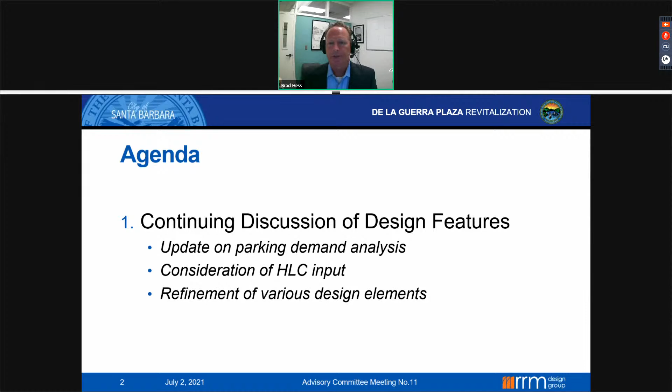First, we anticipate the parking and traffic study to begin in the next couple of weeks. You may recall we did a preliminary study back in 2019, and we were just about to do an in-depth study just as COVID hit, so there was no normal to study. Now that we are in the new normal, we have a State Street that is very much alive, and people are getting back in their cars. So we need to better understand the demand, and having spent more time in the plaza in the last two weeks, I'm really looking forward to this report to better understand the current demand.

Here's the diagram from the scope of work that Associated Transportation Engineers will be doing, which will include car and truck counts, visual and video documentation, and determining the pedestrian flow. We should have that report completed sometime in July, and this information will help us in the design and help us decide what to do with De La Guerra Street. Next slide, please.

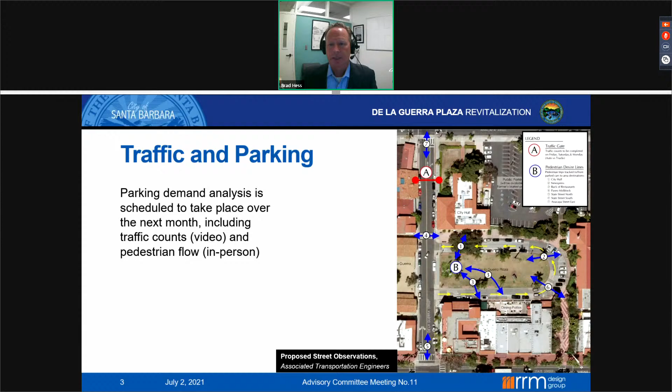Leif, I believe you are going to begin here. Yeah, thank you, Brad. Good morning, everyone, it's good to be here. On May 7th, as everyone remembers, we had a joint meeting of the HLC and this committee.

We had a long, robust discussion on a number of topics. On the screen here is a full list of the items that were recorded in the minutes from that meeting. Some are grayed out, some are black. The grayed out items are topics that didn't really generate a lot of comment, or there was general consensus on, or they were deferred to a future meeting because we weren't ready to talk about it yet, or the commission wasn't ready. So what we're going to focus on today are just the items in black, the highlighted points, which were the items that did generate some comment from the HLC.

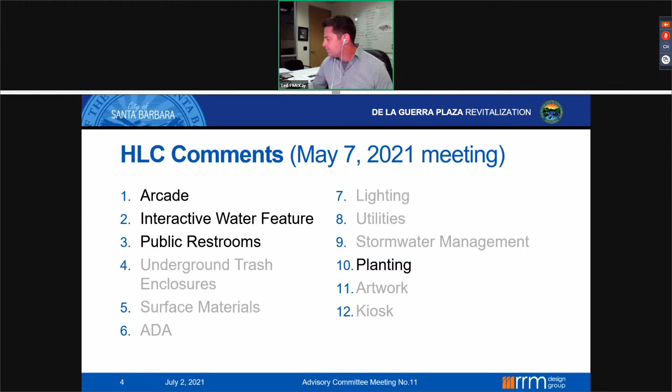I have with me today my colleague, Detty Peikert, who many of you probably know. He's an architect that leads our Santa Barbara architecture practice, and he's going to present some of our thoughts on the arcade. Detty, are you there? Yes. Okay, I'll hand it over to you. Thank you, Leif. So again, we're reflecting back on the joint meeting and some of the comments, particularly as they pertain to the arcade.

I think it started with some questioning about the purpose of the arcade, then a request for explanation of the design, and we got comments back. One concern was whether using an arcade with arches that reflected the arches on City Hall was the right approach, particularly since it might be taking away from the significance of the arches at City Hall. So we went back, took the other comments, and decided to explore a couple of other options for you to consider.

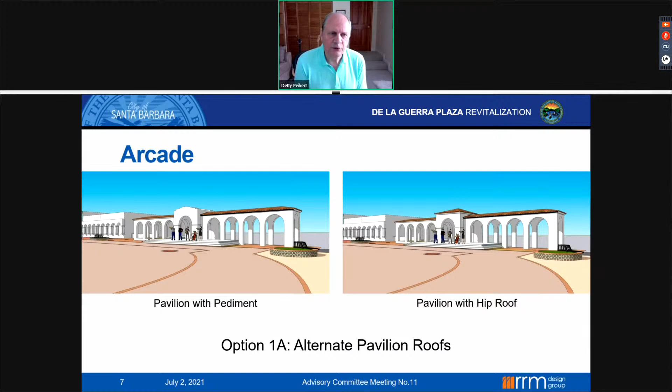We ended up landing on the gable end, feeling it was more appropriate given that it has a bit more of a historic, rustic feel. So that's the arcade with arches.

So if we go to the next slide — again, taking from the comments, the question was whether we should consider something different, something that doesn't involve arches, but rather in this case square openings with columns and a cornice at the top, and then the pavilion.

In this case, we're illustrating it with a hip roof over it, and kind of a cornice detail around that. But in essence, it serves the same functions. It's transparent, you can see through it. It still has the performance stage or raised portion there. So with respect to the purpose it's serving, it still very much serves that.

It's really an aesthetic decision as to whether something that differentiates from the arches at City Hall would be more appropriate, or whether in fact the arches that we illustrated in the first illustration is the more appropriate approach.

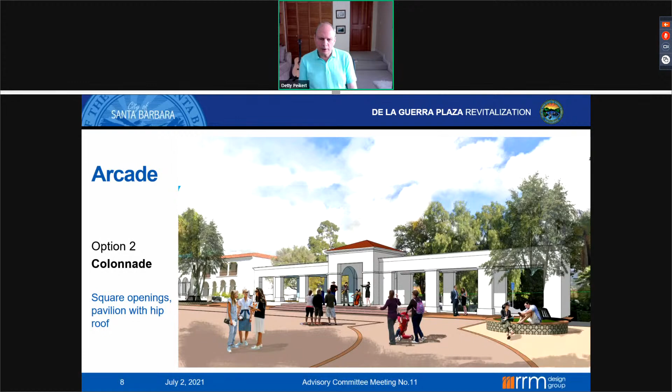So I think that gives you an idea of some possibilities. Again, our preference, and some of the folks we've polled on the subject, I would say the arched arcade is the preference, but there's an openness to the other ideas as well. So that's where we're at with this, and we'd like to get your feedback, thoughts, and preferences, and then we'll propose those at the next meeting with the HLC to get closure on what the design for this element should be.

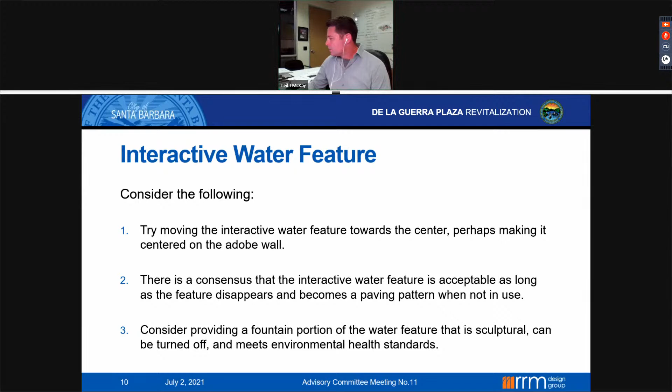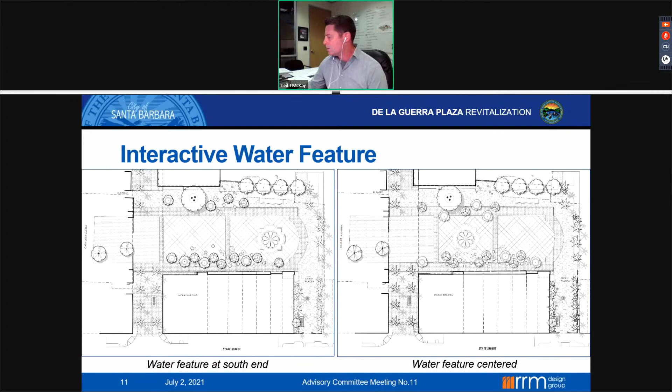There was a suggestion to separate the water feature and the quatrefoil pattern and move the water feature off to the side. In other words, the quatrefoil would simply be an ornamental piece of paving, and the water feature could be moved away to make it more inconspicuous.

We did think about that at length, but we really feel strongly that the water and the paving pattern reinforce each other and create a stronger sense of place. So we're recommending to stay with the water combined with this quatrefoil feature as a single feature.

I also want to mention that it's come up in a couple of meetings that the water feature would be a recirculating system with filters to treat and disinfect the water. All that's regulated by the county health department, so if anyone's been wondering about that aspect, that would be the case.

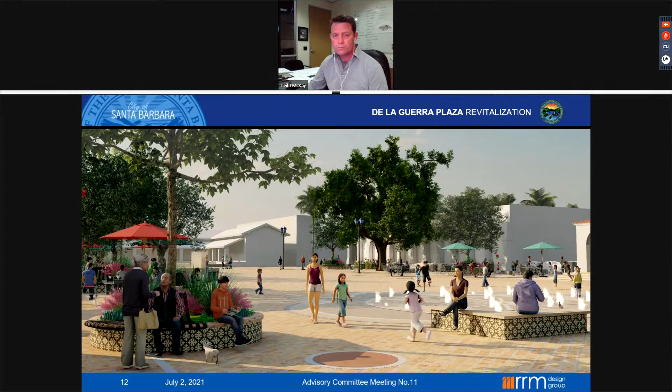And Brad, I think you're going to take this one.

Great, thank you, Leith. So the HLC's request was that we work with the building owners next to the proposed restroom to determine if there is a solution with moving the restroom to the other side of the plaza.

So we went back and looked again at all of the locations we previously considered, applying all the criteria we used to evaluate those other locations, such as safety, access to State Street and the plaza, convenience, etc. We still feel that Storke Placita is the best location.

So there are two options we're still considering. One is this location you're looking at, which was brought up by the owners in our joint work session.

They're the owners of the 726 State Street, and it's potentially doing a property swap with them. So you're looking at the backside of the Ironworks space. The front side of their building is the Supercuts building, and there's a long wall along Storke Placita.

So the idea is that we would exchange potentially this space for a portion of the landscaping in Storke Placita, so that when they did a larger project, the building could actually be wider. So there are several options that we're looking at.

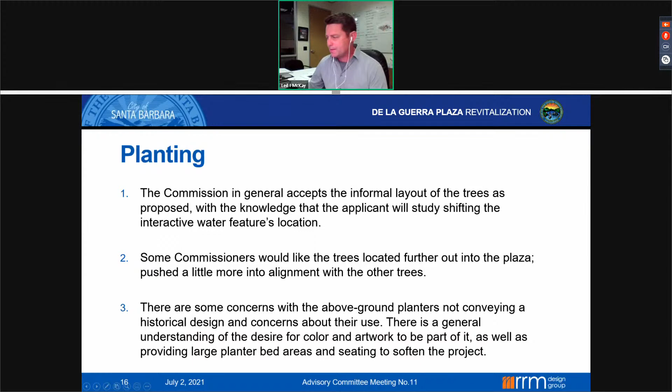So as I mentioned, the placement of the trees is essentially the same, with the one difference that we've removed the trees we were showing in front of the casa because of potential impacts to the casa itself, and also to respect the view corridor along the street up to the mountains. We didn't want to block that.

The commission and the whole group were ultimately comfortable with this random placement of the trees along the edges, and the same goes for the planters. We believe the planters are very important to protect the vegetation, and to provide ample casual seating in and around the plaza without needing to put out benches on any given day. And also to help define some of the outdoor rooms.

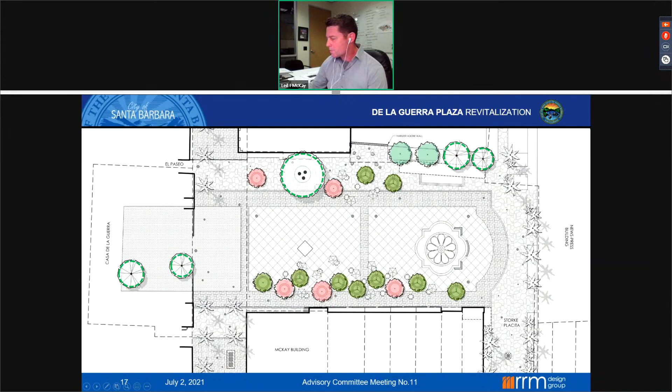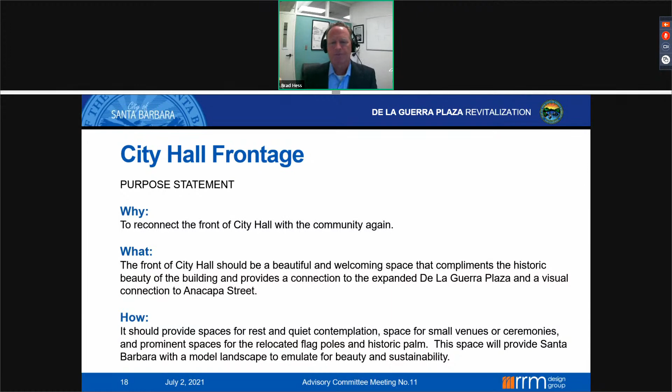Great, thank you Leith. So next is the City Hall frontage. One of the expanded scopes of work that we gave to RRM is to basically redo the front of City Hall, which is in desperate need of this if you've been there recently. The charge by Anthony Grumbine, who is the chair of HLC, was that you really need to understand exactly what you're doing and why you're doing it. So we took the time to really investigate and rethink: what is the purpose statement for the front? What do we want to accomplish here?

The why in this is to reconnect the front of City Hall with the community again. The what in this is, it should be beautiful, a welcoming space that complements the historic beauty of the building and provides a connection to the expanded De La Guerra Plaza and a visual connection to Anacapa Street. And how this will be done is it needs to provide spaces for rest and quiet contemplation, space for small venues or ceremonies, and a prominent space for the relocated flagpoles and historic palm. This space will provide Santa Barbara also with a model landscape to emulate for beauty and sustainability.

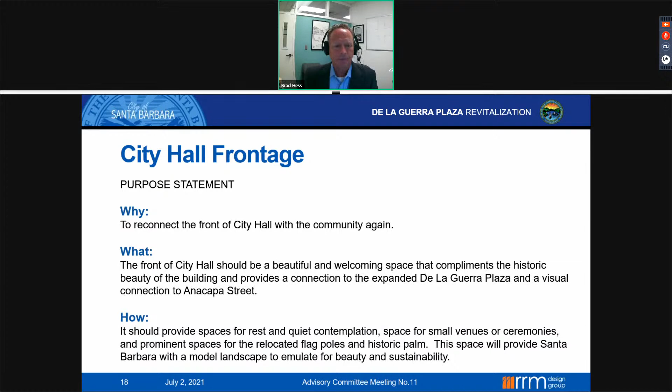Next slide, please. So looking at safety, as we talked with those inside City Hall, we had a great conversation with several members. This was one of the primary needs. The lighting is terrible in the evening, so that needs to be improved. And currently there's a hedge that surrounds the entire area, and that provides some really dark spaces for people to occasionally go to sleep, and we really want to open that up and improve the safety.

In speaking with Keith DeMartini in finance, he had a great suggestion, which was that this could be a wonderful opportunity for small events or ceremonies that we have throughout the year, or even for staff meetings. So the front of City Hall could be used for smaller venues like that.

Now, in terms of wayfinding, there are people that come to City Hall for a myriad of reasons, but being able to just have a better way of showing them how to get into City Hall is what we're after. So currently there are many who walk up to City Hall and go either through the Anacapa entrance or down De La Guerra Plaza entrance. They pay their bills or they take care of their business at the counters.

One of the ideas is to both make it more convenient for paying bills, but also to reduce the number of parking spaces needed, is to provide a drop box directly across Anacapa Street from City Hall. It would be similar to a library box where it's on the left side. So you basically drive up, drop your bill in, and you continue on your way, and you don't need to use a parking space. Keith loved that idea. So operationally, we need to figure some things out, but that will definitely be part of this proposal as well.

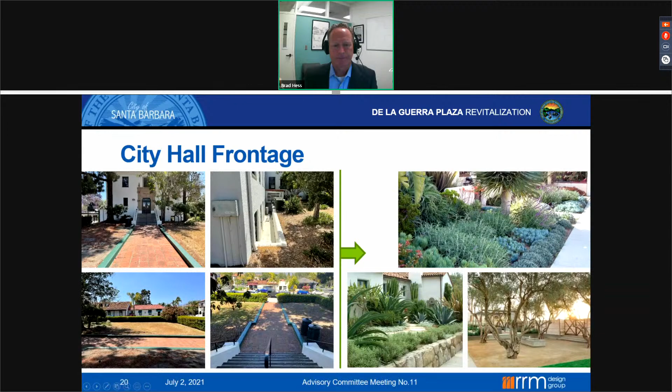And this is you. All right, thank you.

I'll go back briefly here. Everything to the left of the green line is our existing photos. It highlights how this existing landscape really doesn't have a very good relationship to the public street, and the hedge is acting really counter to that goal. The photo at the top right, left of the green line, really shows there's some stuff that looks almost like the back of house, where we've been told people sleep and things like that.

So it really does need to be opened up a lot, and some of these character photos on the right show the inspiration we would take, reflective of a lot of the landscape materials and plants you see in the EPV, especially just up De La Guerra Street, a little bit around the Historical Society.

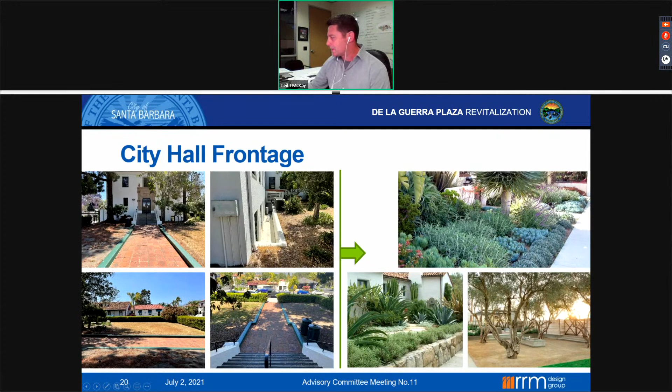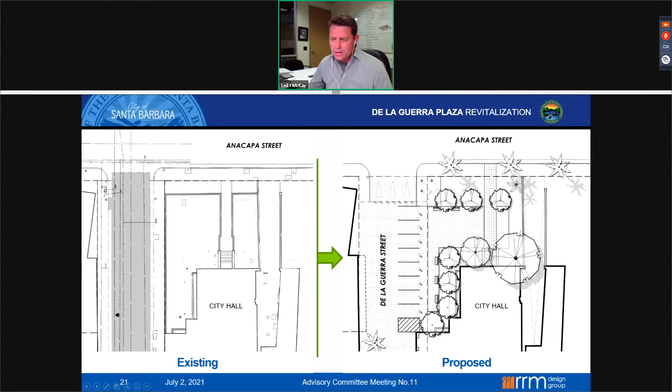One of the biggest things is we remove the hedge completely and open up the whole corner to the street, to passers-by, and to people entering the plaza. We've also created a lot more usable flat space.

Now that the hedge is gone, we can create a smaller mini plaza, if you will, that runs north-south, where that decomposed granite label is. That would be where you could sit quietly and read a book, or take photographs for incoming elected officials, or host smaller events.

You'll also see a couple of things here. The flagpoles that Brad alluded to on the corner give them some more prominence and stature, so it feels like you've arrived at City Hall.

The relocated palm tree to the top right is the Washingtonia currently in the plaza, in the middle of the grass today. We're showing it move because we're concerned about its long-term health with the new project in the plaza, and also it gives us more flexibility for achieving our programmatic goals in the plaza.

That tan-colored hatch pattern represents a shared street, which would all be flat. There are two different materials: the street itself is brick, and then it transitions to a decomposed granite that has a similar character and quality to the Casa courtyard.

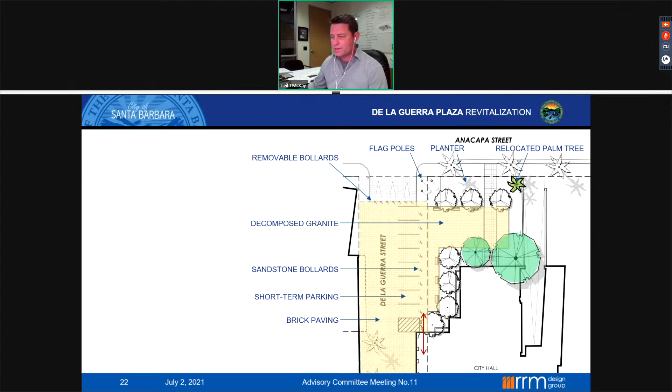And finally, this is the last slide, and there's not a lot to show you regarding this. It's more of a refresher of what our current plan is.

We've been continuing to coordinate with a vendor who provides the underground trash system, and we've identified these two locations shown in red. They've moved around a little bit since you last saw it, particularly the one on De La Guerra Street, because there's some heavy infrastructure coming through that street with Edison and other things. So we've been fine-tuning it as we go, but they're in the same general zones, and that will continue to be worked on. This is just more of an FYI slide.

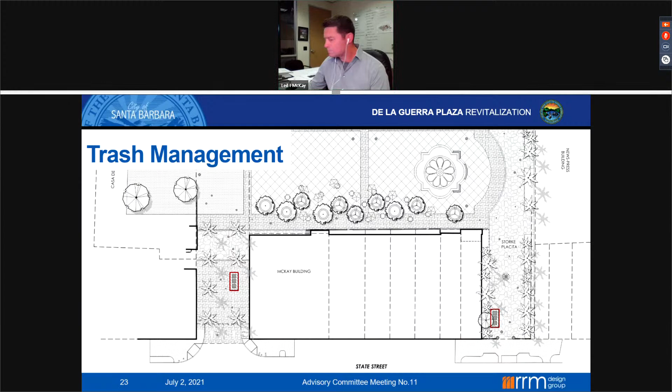And Brad. Great. Thank you, Leif.

Just to remind you again of next steps, we're doing the parking and traffic study, which commences within the next week or two, and we're hoping to have that report in July.

Another thing we've realized as part of all of this change in the last year and a half, it's been a little over two years since we had the public workshop at Casa de la Guerra. So we want to do another online email survey just to make sure we're still on track with the changes in the community. State Street is very different than it was two years ago. That will take place sometime in the next few months as well.

Depending on the results of those items, that will help us determine whether we need another advisory committee meeting prior to going back to HLC, or whether it's just a confirmation of everything we're doing now and we can go directly to HLC. So stay tuned on the results and next steps.

Madam Chair: Thank you, Mr. Hess, that was a lot to cover. I want to echo what you said about the success of the joint meeting with HLC. I found that very productive, to just have a conversation where members of HLC were able to ask members of this committee why a water feature is important, for instance, or what the thinking was behind certain features. It was really helpful on both sides to go back and forth, so we'll keep that in mind when we make a recommendation about how to proceed.

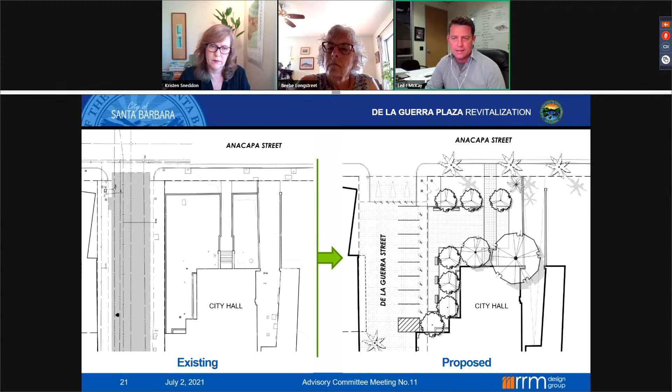Commissioner Drury, good question. I don't think I mentioned that those flags are the ones currently in the plaza, which would serve the same purpose relocated to that corner. We actually showed them moved closer to City Hall, relating to the facade better, since that huge tree was getting in our way. It comes out 20-30 feet from the building, pushing the flags further from the front steps anyway. We thought it would be a good option to put them out on the street for a prominent statement at the corner signifying it's a civic building.

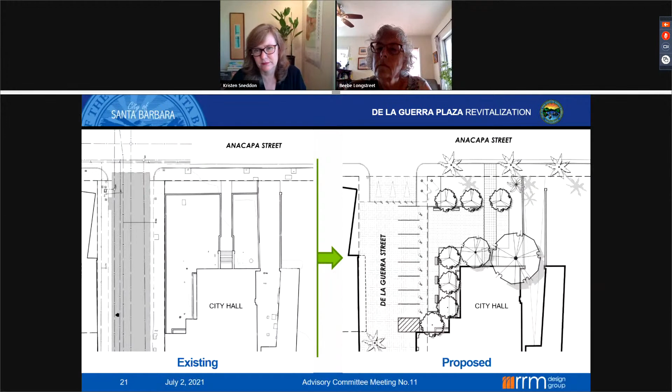Yes, it would be a similar character - smaller plaza trees, probably olives like we're putting in the plaza on the other side.

Commissioner Longstreet: My question is about accessibility at this entrance. What are our requirements, and is there a way to meet them? I don't think of this as the front - I've never thought of it as the front of City Hall, so it's a new concept to me. I always think of it as the back door. If it becomes the front door, what do we need to do for that? Great question, I'm with you - I also thought of it as the back, and I'm looking forward to it having a refreshed look as the front.

To answer the question, we need to provide an accessible entrance, which currently exists on the De La Guerra side of the building. So we would not need to make this front of the building comply for additional ADA access. I think that comment is perfectly suited to why this needs to be done - the address is 735 Anacapa Street, not De La Guerra Street. There's a reason people don't associate this as the front of City Hall - it's not very welcoming and people don't use it. People tend to use the De La Guerra Street side.

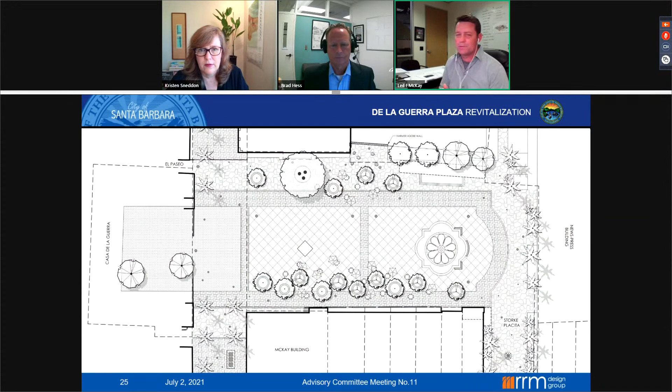Thank you. Are there any other questions about City Hall frontage at this point? Our last category for questions would be trash management - I don't have any questions on that one, if anybody does.

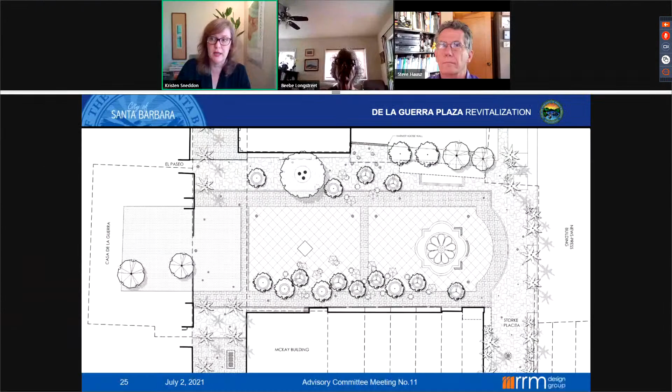Thank you. So I think what we will do is go back through topic by topic, starting with the arcade. Those who want to speak first, and then I'll be sure to call on anyone who hasn't spoken yet, just to make sure that we've gotten to everyone on input. So back to the arcade, and if there's nothing specific, well, I'll leave it at that. Commissioner Longstreet, did you? Or okay, well, we can go in order then too. Vice Chair Wiscombe, did you have comments on the arcade?

Thank you, Madam Chair. I really like the openness of the trellis. If that could go, that's option 3. I also like option 1. I know Mr. Piker prefers option 1, but I just felt this was really open, and then with the backdrop of trees, the greenery in the back, that this would achieve the objective of enclosing the plaza and providing the performance venue. So that's probably my choice, but it would be option 1 or option 3. I don't care for the square openings, the colonnade with the square openings, option number 2. Thank you.

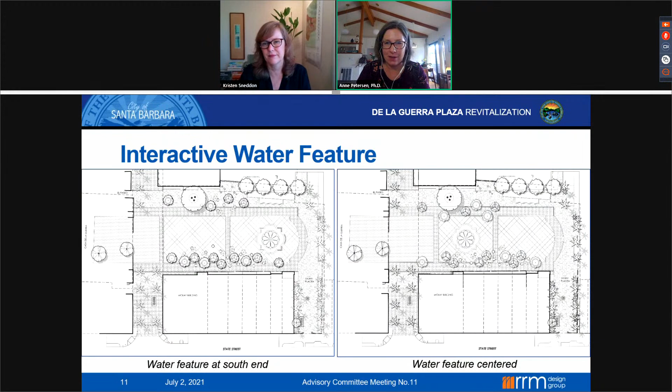And Dr. Petersen: I'm also really pleased with how it's turning out. I think it's become subtle, but still very effective. I do like the lower spray we saw in that drawing as well. I could have gone either way on the location, but I do find the designer's argument convincing that it serves well as an anchor on one end. I also have concerns about the archaeology and impacts if we try to put it in the middle.

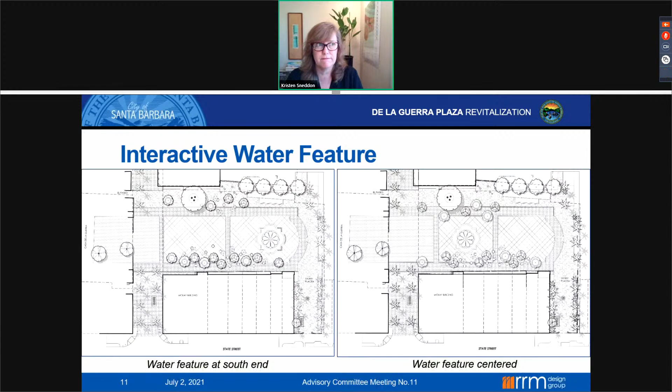Our next one to discuss is the restrooms. Mr. Hess, could you give us a little bit more detail? We had a caller with maybe a different perspective on that, and maybe we're not ready to fully discuss this yet. If more conversations need to happen with property owners, that would be fine today too, but I'll have you direct what you need from us on this item.

Thank you, Madam Chair. Mr. Chaffee brought up a couple of different points that I think will probably need to go into the negotiations rather than being more of a policy-driven decision. The direction I think we're looking at is, as we've looked at alternative locations other than Storke Placita, we really looked at it from what's going to make the most sense for the public and the use of the plaza, and who will be using this and how do we want them to use it.

So we think that the Storke Placita area makes the most sense. The two options we're looking at really come down to: is the committee comfortable, if we use the ironwork space, having the restroom actually on the plaza with a similar look? It won't look like that because they're going to be high-tech restrooms. Or, if you're not comfortable with it actually being on the plaza, around the corner in Storke Placita. That's really where we're looking for direction, because I think it's more of a policy and conceptual decision in some ways, since we may or may not be able to work out the details of the real estate transaction. But if that's the preference, we need to keep all of that in mind. I hope that answers the question.

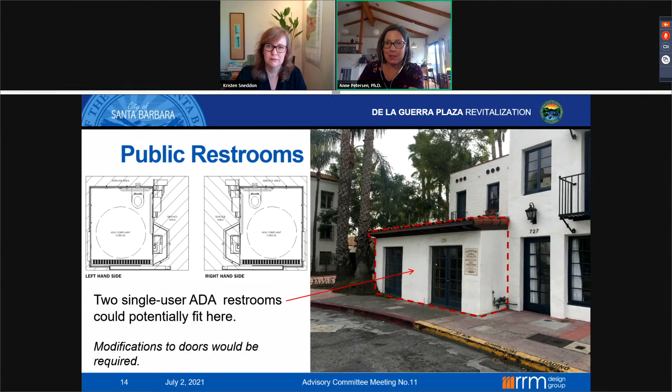I'm also inclined towards the Placita, but could be convinced as the design develops.

Commissioner Perry, same opinion, Placita side. I'll add in the two leaning towards Placita, and also several of us could be convinced otherwise. Does that help? Yes, it does, thank you Madam Chair.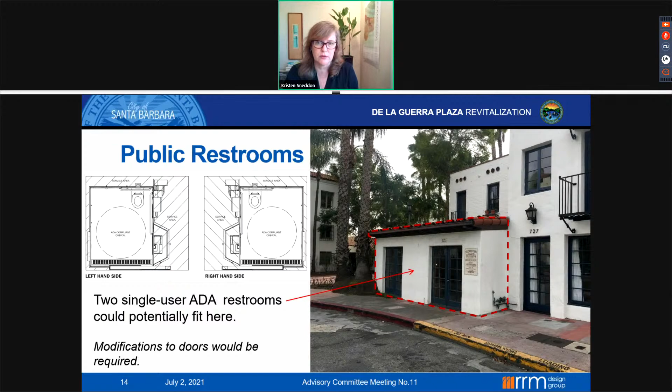Thank you. Now let us talk about the planting. Would you help us frame the questions we should be answering on the plantings?

I could jump in. I think not a lot's changed, so we're just looking for validation that this is still a good course to be moving forward with. And then I think we might want to be considering HLC's comments or questions about whether the raised beds are appropriate for this area or not, and if we're committed to that.

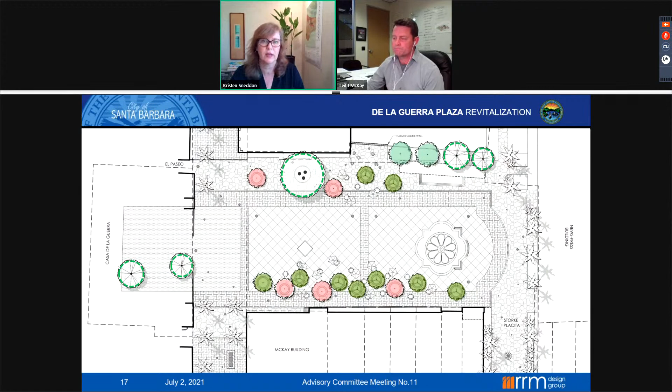Does any... yes, Vice Chair Wiscomb and then Commissioner Hausz. Commissioner Hausz, you want to go first? Oh, okay.

I was the voice on HLC that was fine with the arrangement as proposed. I certainly like the raised planters, provides seating, keeps people from walking in the landscaping or standing in it during fiesta events, et cetera, protects the lighting that will be in it for uplighting trees. So I think there are many reasons for that. I will validate this design.

Thank you, and Vice Chair Wiscomb. Very well put, I totally agree. Just a couple comments. The planters are important to provide seating, but as Mr. McKay said, they also protect the vegetation, which I think is really important, because the plantings in this plaza are going to be really, really important for a lot of reasons. And I also wanted to add that...

When we were talking about the arcade and perhaps the trellis was a little more open, the designers have provided 2 new trees behind the structure. So I think there'll be a really nice green screen, whether it becomes the arches or the trellis, that kind of softens the effect of the parking lot and really anchors that side. So those are my comments.

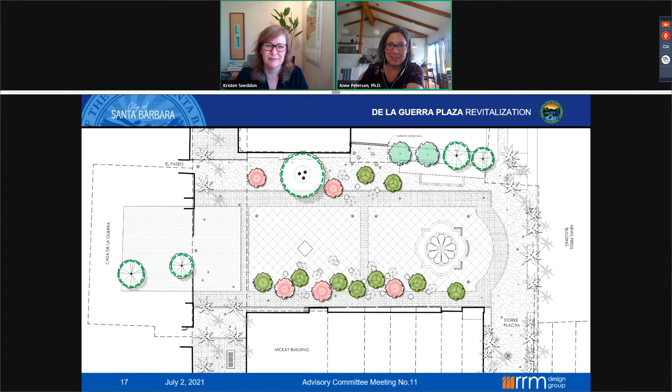Thank you, and Commissioner Perry. I'm going to stay in agreement that I like the plan, and incorporating the CASA beautifully.

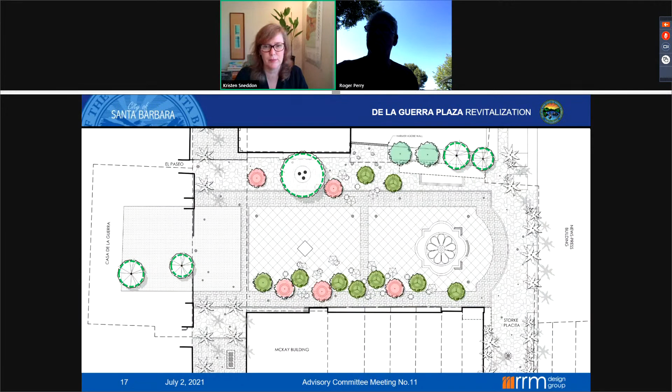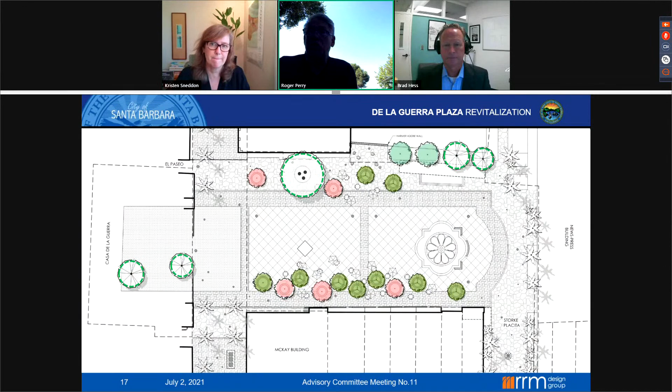Okay, thank you. And I think also from your perspective with Fiesta, these work well in their configuration with Fiesta? I know that would be a question we'll have. I've been waiting to see an infrastructure as to how the underground utilities are going to come in and preserve booth space. But what was said earlier about protecting the landscape and preserving it and providing seating, I think it lends itself to a festival very well. So you're going to have a lot of those hardscapes be functional for festivals and things that occur. Seating's always been lacking during the mercados. So a good plus, thank you.

Did you have something to add to that, Mr. Hess? I do, Madam Chair. I just wanted to let you know that we are meeting with Old Spanish Days on July 13th, so they'll see this plan and we'll confirm both the booth layout that could work with this plan, as well as get more information from them regarding infrastructure. Thank you, very helpful, I know we have a lot of people concerned that it will still be usable in that way.

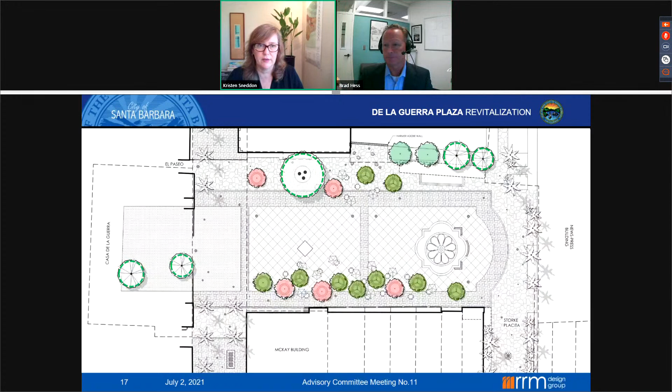And then I'll add that I'm also highly supportive of this plan. When I think back to the original shade structures and bench seating that were proposed and how far we've come from that, to having the natural shading of the trees, the benches that will be beautiful and lit, and with protected landscaping in there. I'm highly supportive of this as making an inviting, welcoming space that can also be passively enjoyed. I do also appreciate that the CASA is framed better. And to the public comment we had about there still being trees in De La Guerra, those are existing trees.

Those aren't new plantings. I just want to confirm that along De La Guerra Street there, those aren't proposed new plantings along there, so it should not affect any later discussions about circulation patterns in there too.

This is another one of those that's come a long way, really through back and forth and with input, and it's supportive.

So the next topic to discuss is the City Hall frontage.

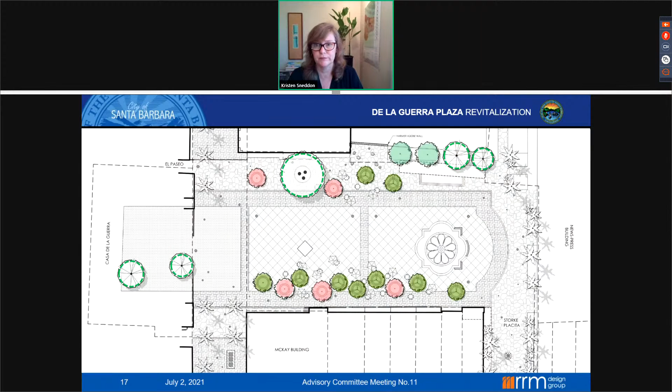I'll ask you to help frame the question of what it is you need for this committee to weigh in on, if it's general comments or specific areas where you need direction. I think I would like comments on whether the committee feels that we are on the right path with the goal.

Secondly, there are some features we've highlighted, such as the relocation of the palm tree, which, just as a quick side note, I've worked with two very prominent landscape companies that specifically relocate large specimen trees. Both have assured me that this is feasible. Putting a grass family tree into an area with more availability toward irrigation could be a very successful move. The third is the flagpoles, and just the prominence we have on the corner lends itself to highlighting those flags.

Right now they're stuck in the middle, but we don't really use them. This would give us the opportunity to use them, and whether or not the overall look and feel is what we are expecting from the front of City Hall. So kind of those four points.

Thank you, it's very helpful. Are we discussing the parking at all at this point? Or is it, you didn't mention that as something, and I would actually be fine to wait on talking about the parking until we've had our circulation study, but is that something you need us to discuss now?

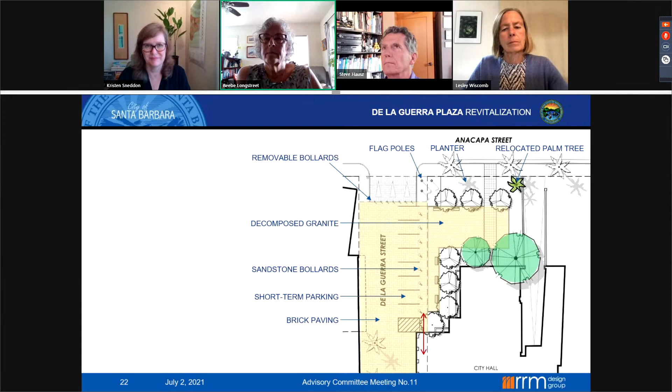I think to the library, that beautiful door in the library that we never saw until it was addressed, it feels like that same kind of project to me. So it's exciting. Thank you, and Commissioner Hausz.

Oh, Commissioner Drury. Oh, you heard my little attempt. Thank you. Thank you. Yes, I think this is...

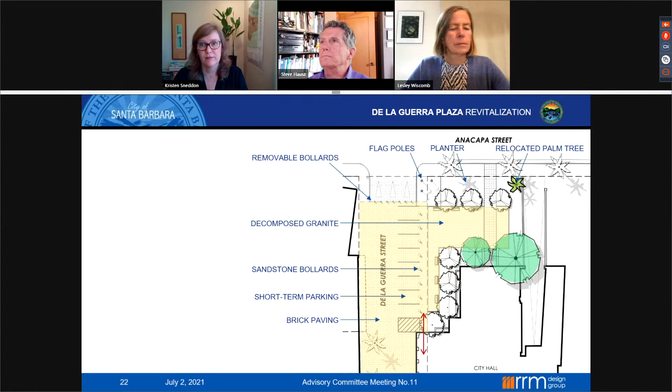I park on Anacapa in front of City Hall every time I need to come down there because I love that elevation. And I'm always surprised that it's never swept, that there's trash in the sidewalks. And it's really a shame. I'm really happy that this is being addressed as part of this project.

So I guess I could go either way with the flagpoles, but the problem is there's three of them, so you don't have the opportunity of putting one right in the middle of the pathway and framing the building that way. So I think on the corner would be just fine.

But I do think that the three trees or bushes in front that are proposed are a mistake. I think when that facade, that elevation, is cleaned up, it's really a lovely architectural addition to our city that's been forgotten, basically.

I think those 3 trees should not be there. I would certainly support removing the hedge, but I think some sort of something beyond bollards. Maybe a low stone wall painted white to formalize the entrance coming along De La Guerra and turning the corner on Anacapa. And there's the small green tree on the plan that's looking pretty sickly, and I think that should be replaced as well.

So I think that 2 or 3, I guess 2.5 story elevation should certainly be washed with a power wash and repainted and revitalized in that respect. But I fully support anything that will make that a much better elevation.

Thank you. Thank you.

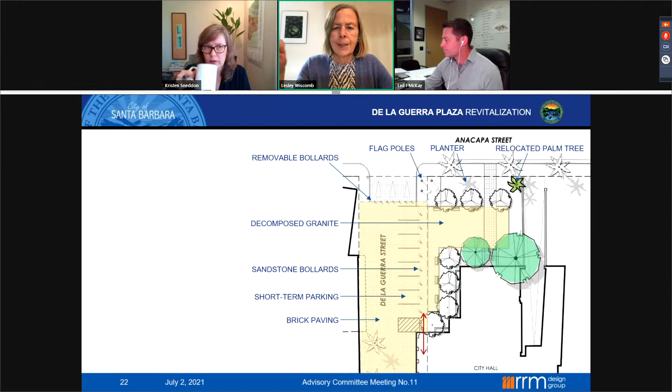Thank you, Madam Chair. I have one quick question for Leif, if he could pop on here. The slide before this one that shows the kind of before and after landscape examples. No, it's not that one. It must be the one before that.

Yeah, that one. So are you also proposing understory plantings here to create a more water-wise garden looking environment at City Hall? Yes, exactly. Next time you see this, it'll be more illustrated to show that. But one of its goals is to be a demonstration garden for water conservation and climate appropriate plantings. So definitely.

Great, thank you for that. I thought that was the case based on this slide, so I like the landscaping. I think we want to make sure when the frontage gets done that it is safe, and the lighting is really good. So I think that's going to be very important here.

And I like the drop box for the bills on the other side of Anacapa, I think that's great. The relocation of the flags I think is very appropriate, a very appropriate location, and where the tree is getting relocated, the Washingtonia, it provides a nice balance with the height of that tree and the height of the flagpoles flanking either side. So I'm pretty happy with that.

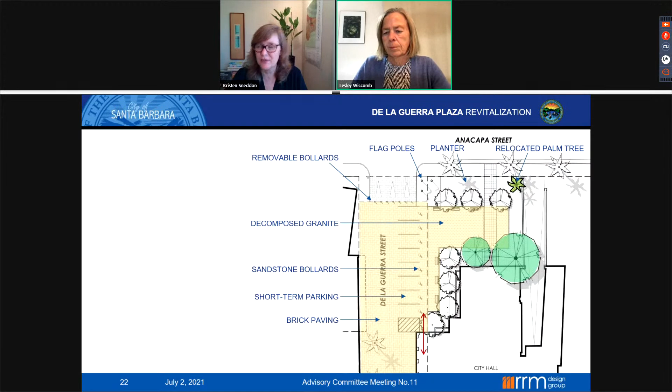Thank you. Excellent. Thank you, Vice Chair Wiscomb. And Councilmember Harmon.

Thank you, Madam Chair. I'll add my voice to the chorus of support on this. I walk down Anacapa at least a couple times a week, and almost every time I walk by this frontage, I think how beautiful it is and how much potential there is. It's always confused me that we don't use this, and this is indeed the front. I'm really happy about this, really excited. I like the flagpoles. I think that's a great location, and the connection between the bank and the post office is really just a lovely continuity on the few blocks there of Anacapa. I really appreciate the care that's gone into thinking about this frontage, and I'm super excited for what it's going to be.

Thank you. And have we heard from Commissioner Perry? Oh, and Dr. Petersen as well.

All I can say is long overdue. Love the flagpoles. Love the fact that that side of City Hall will become more welcoming, because it isn't in its current state. So hats off to the professionals who are going to dress it up.

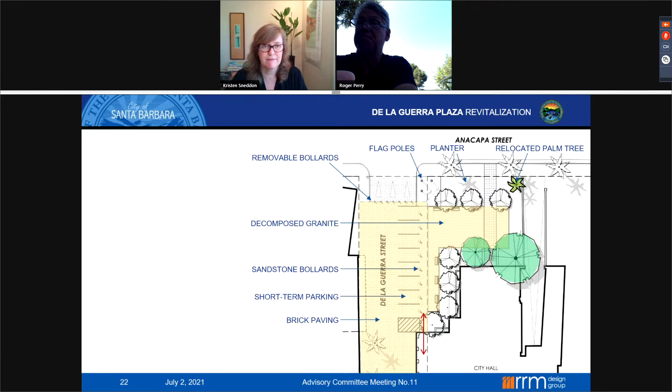I'm just supporting everyone else's comments. It is long overdue. I think the landscaping potential is really inspiring. I do support Commissioner Drury's remark that the three proposed new trees at the front don't need to be there and would take away from the facade of the building. I'm also supportive of removing the hedge if it's not a contributing resource. I think the temporary parking and the bollards address, in part, some of the concerns we heard in public comment about access to buildings, but it also blends in really well with the pedestrian use of the majority of the area. So I think it accomplishes both. And I like the removable bollards so that the area can be closed for public festivals when needed. So I'm very excited about this.

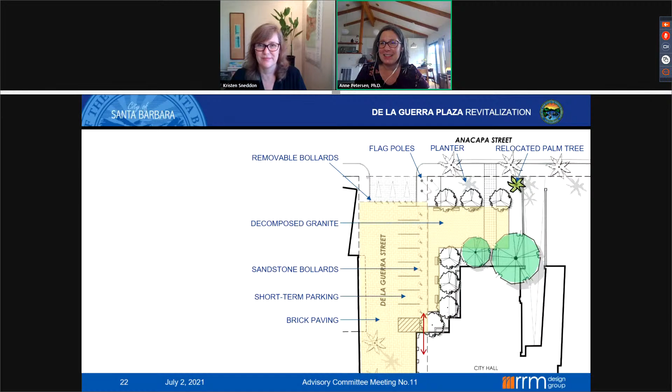Thank you. I think we've heard Commissioner Drury. Yes, you heard me mumbling. I just have two comments. One is that if we're going to do this wonderful thing to the front elevation of City Hall, and we're going to have parking or any access on De La Guerra, it would be nice to have a pathway connecting to the steps — a formal, dedicated pathway, maybe made out of concrete to match the one that exists, to the steps that lead up to the front doors. The other, rather pie in the sky, is that there are these vast parking areas owned by the News-Press, I believe, that hopefully will come into play at some point. That'll relieve the difficulty of losing parking spaces through this project.

Thank you for your comments, Commissioner Drury. And then, do you have something, Mr. Hess, or I'll close out? I actually have one comment. I believe Leif has a comment as well, Madam Chair, and then I'll have a comment also.

If I may, I just wanted to address the accessibility parking spaces. Currently, there are zero parking spaces for ADA in the entire loop or on De La Guerra Street. I just confirmed it with Google Earth to make sure I wasn't saying something inaccurate. Our plan currently is to use the ADA spaces available in the City Hall parking lot for accessible entry. I have not confirmed that as a plan I can count on, but that's what we have had in mind, because those are, for the most part, unused spaces. It's a great path of travel from those parking spaces to the ADA ramp on the De La Guerra side of City Hall, so that would be the accessible path of travel.

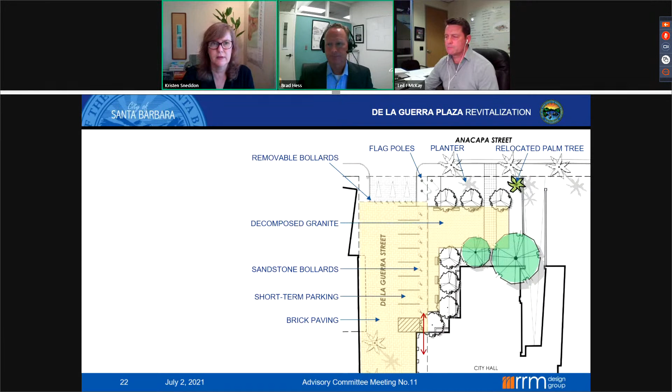Thank you, and Mr. McKay? Thank you, Madam Chair. Several of you brought it up, so I thought I'd weigh in on the historical landscape at the front there. The hedge and the big aloe, or succulent, right on the corner — we've already vetted that through our historic consultants, post-Hazeltine. So what we're showing you, we're confident that it passes that litmus test.

Thank you. I think we're all relieved to hear that.

None of us seem attached to the hedge at this point, so I'll finish out my comments. I love the idea of a demonstration garden that's beautiful and a leading example of what it could be. And I think the whole plaza in that too - it's really a big shift from all of the grass that we have. If we can really show that it can be cooling and beautiful and still take into account our drought conditions and climate, I really love that idea.

I like the direction this is going. I think it's really exciting to think about what this space could be. Right now it's really sort of behind hedges and dark and just not very welcoming, and it is such a beautiful entranceway there.

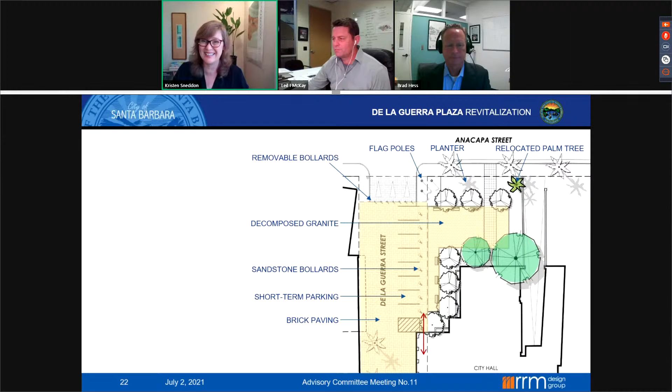Okay, I think that if there aren't - do you have what you need on that? But I think in general everybody's very pleased with this direction going forward, and full support that this is getting the attention that it needs. And I'm excited that this is considered part of the plaza, so that we can take care of this all together. So thank you on that, and if you have anything to add there.

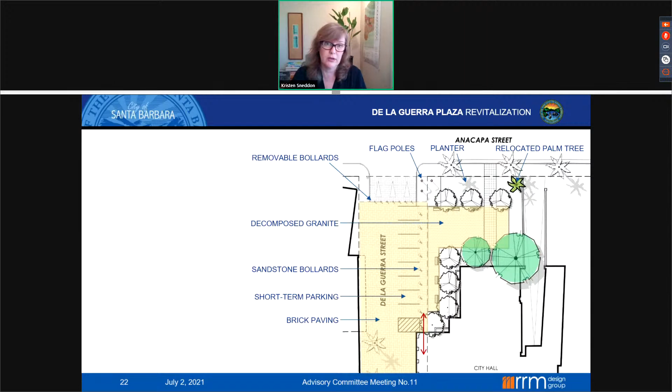And then I think, was that our last major topic? If you want to lead us into what our next steps are and what you need from us for the next meetings. Thank you, Madam Chair. We've received great direction and feedback today.

Because we don't know what will come of the parking and traffic study, nor the survey, I'd like to request patience from the committee to the design team. We will continue working on the design based on the feedback provided today, as well as informing the committee of the outcome of the parking and traffic study and the survey. I think that will help dictate the next steps. So if I could just ask you to indulge us with some time, we'd appreciate it.

I'm in support of that. I do think it's worthwhile talking about, and if you could let us know when we might talk about what would be on the email survey, if we have a chance to meet before that goes out, or if you want some input at this point. It's not something that we've talked too much about.

I do think it's an excellent idea. We are in the process of seating the State Street Master Planning Committee, and when we first started talking about closing De La Guerra Street and making this a pedestrian-only plaza, we didn't know what was going to happen with State Street. I think there's a lot in there to ask the community about, and I'm not sure if that's part of what would be in this survey. I'd like that to be part of this survey, but input on that.